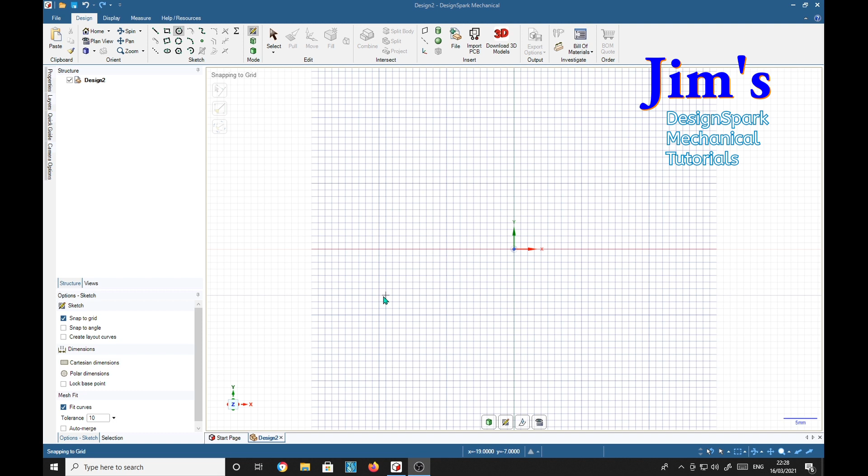Okay, in this video I'm going to show you how to put a handle on a mug or cup or tankard or whatever. So we'll make the tankard first.

We'll start with a circle. We'll just make it any size we like. Pull, move it a bit.

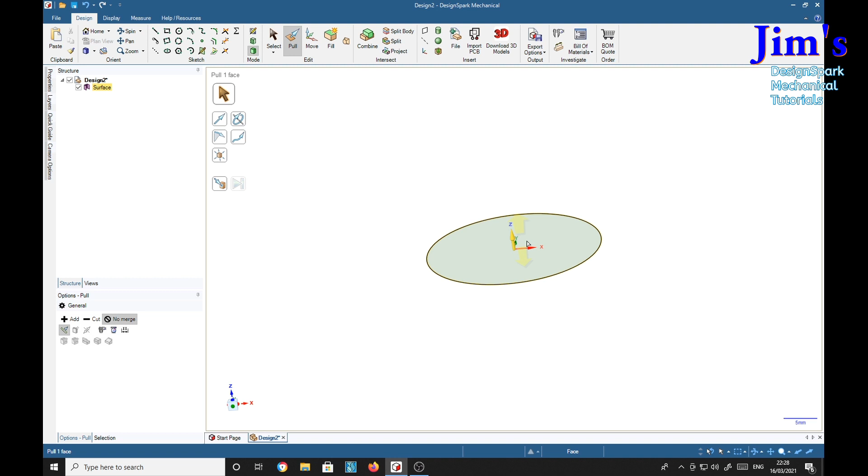That should do it. Then we'll use the shell tool up here. We've got one, we'll make that 2 millimeters. Return, click. Right, I've got a rudimentary cup shape there.

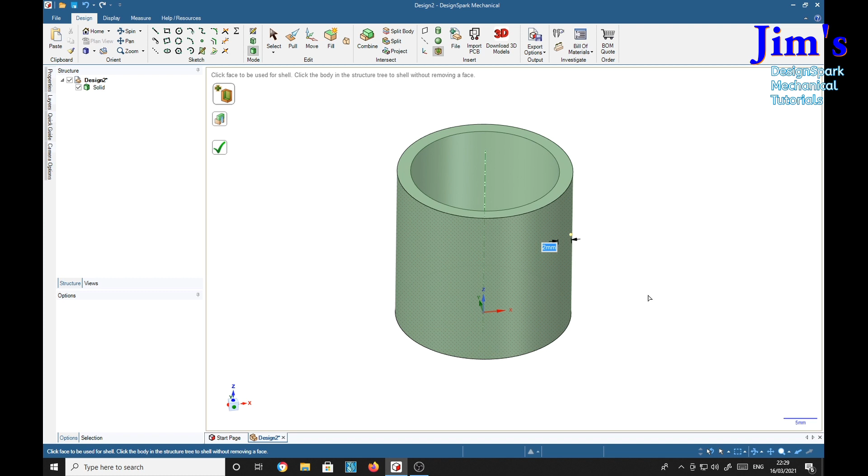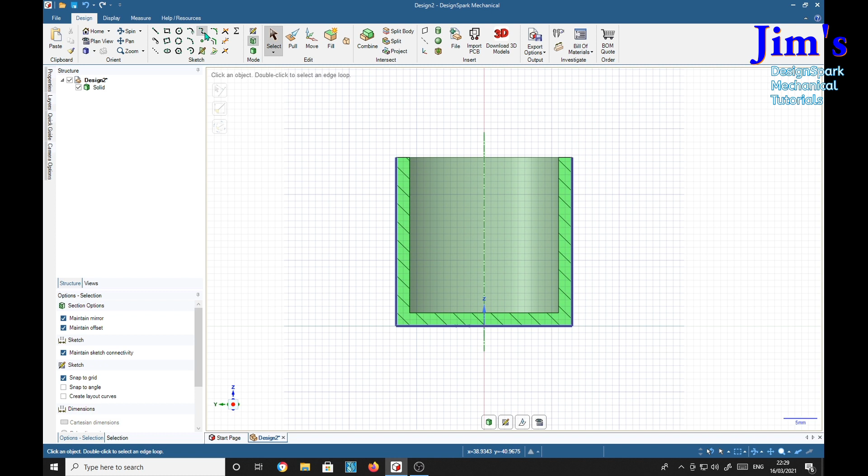Now we're going to select the center line, press the X key and we'll get a section. V key, there's our section. And we're going to choose over here the spline in the sketch panel. Select that.

I'm going to start in the middle of this thickness here, not on the outside, in the middle, or about here, and we'll make some sort of handle shape and end in the middle. And don't close it, because if you do, it'll turn into a surface rather than stay a line. Want it to stay as a line, then escape key.

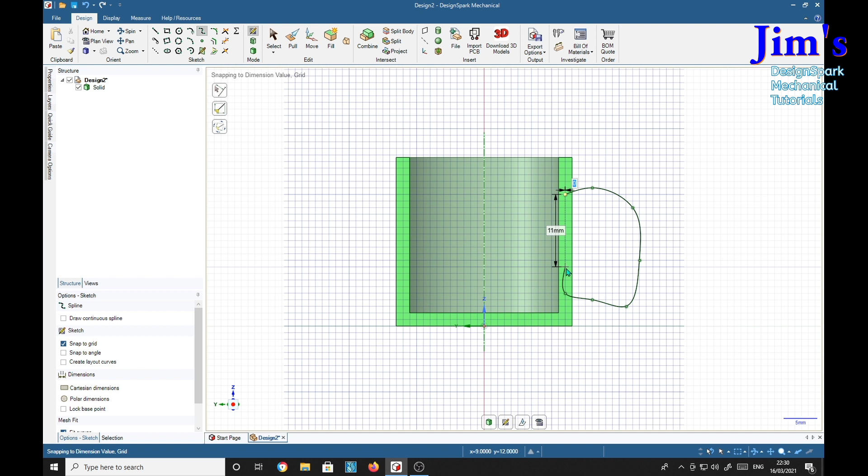Oh, what a terrible handle. Never mind. Now we'll go to D for design mode.

Select the select tool, select the line we've drawn in space. Then the cylinder in the insert panel.

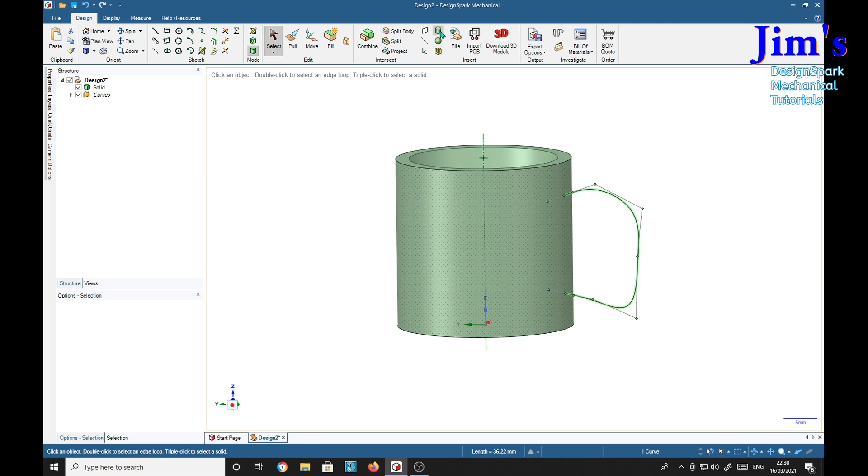And we move it until it's roughly the shape we want. 1.31. Right, there we go.

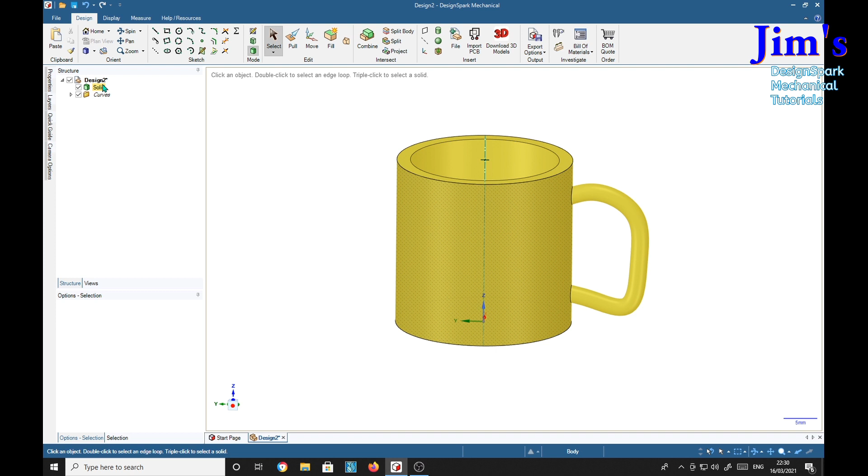And notice it's still one solid. It's merged itself.

So if we select the pull tool, we can select this corner here. Then control click this one. And if we like, we can control click this sharp corner in here. And then type 1 millimeter radius for them all.

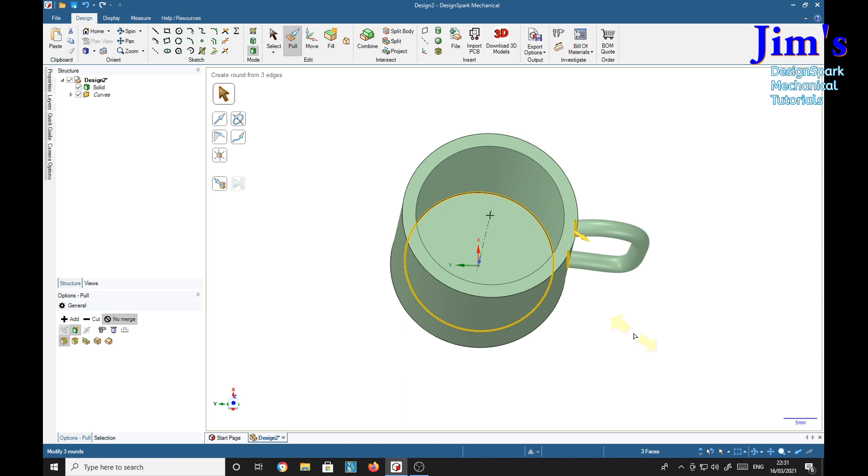Deselect, and we've got a nice radius in there, and we've got a nice radius there. There you go. We've got our cup, mug or tankard.

We don't want sharp corners here, of course, so we could easily select that, control select the other one, give that one as well, 1. We've got a nice circle around here.

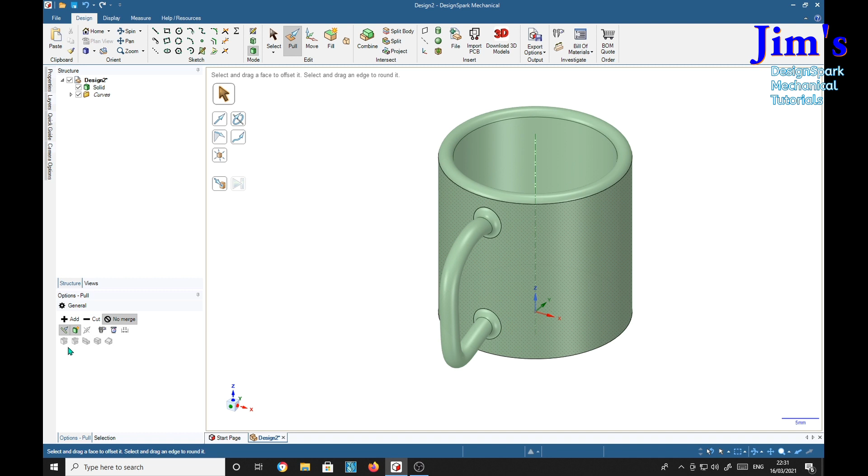We could have put bevels on if we'd chosen a different one down here, but I think that will be kinder to your lips.

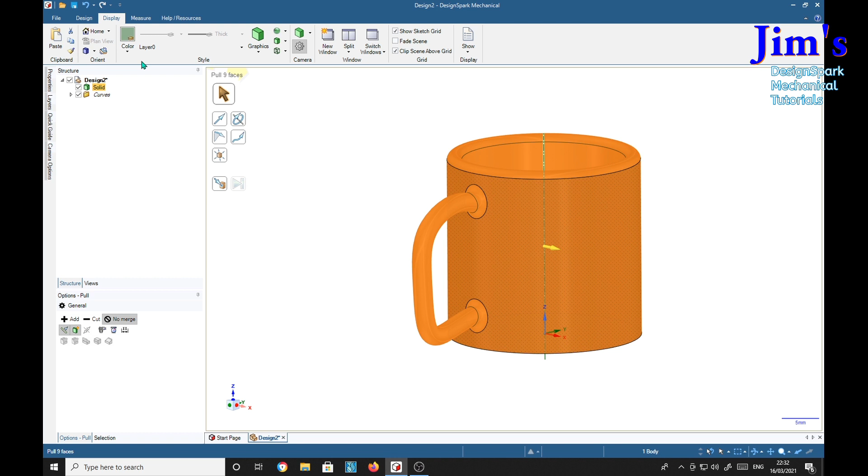Change its colour, of course, display, even change the luster and make it a metallic. Finish, medium gloss. What would be a nice shade? Slightly silver. There we go. There's our tankard.

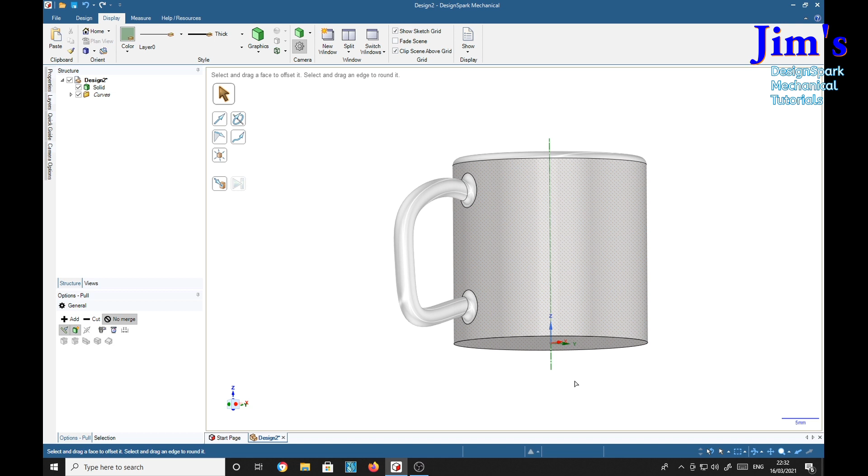You can make this rather more decorative than a cylinder, just make a different shape. You could concave it by using a profile and then rotating the profile into a cylinder. But that's the principle of putting a handle on a cylinder. Hope that might be useful to you and interesting.

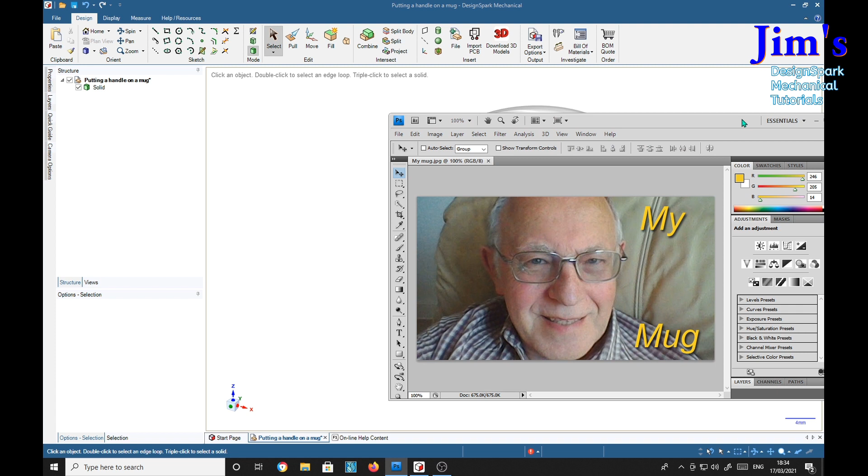As an afterthought, I thought I'd decorate this mug, and what better than a picture of my mug there. This is what I've done on Photoshop. So I've saved that as a bitmap.

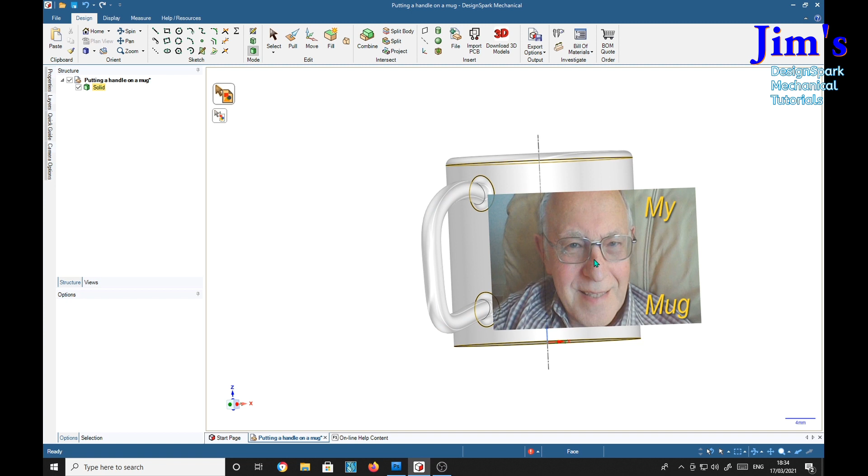So what we could do is we go to File, here's the bitmap. Okay, so we dump it on. I'll square this up a little bit. I'm going to put it just here.

Oh, got to do the wraparound. There we go, that's a wraparound. Just so I get the text to the left of the handle there. Now it doesn't fill it.

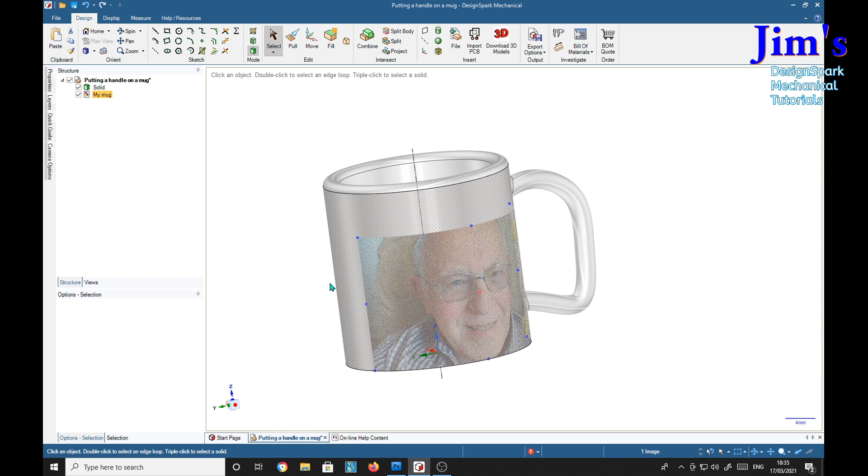So I'm going to select the mug. And now we see we've got handles here, little blue handles. So I think it's Shift and it remains in the right ratio, so yeah, there we go. I'll have to turn it a bit.

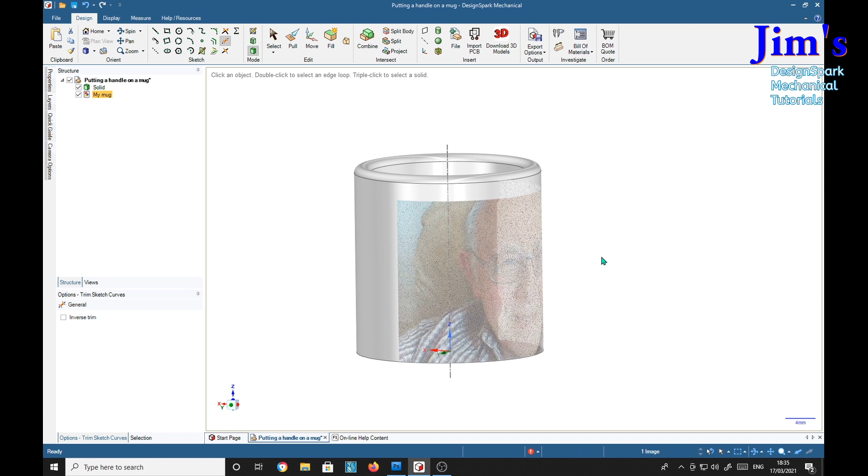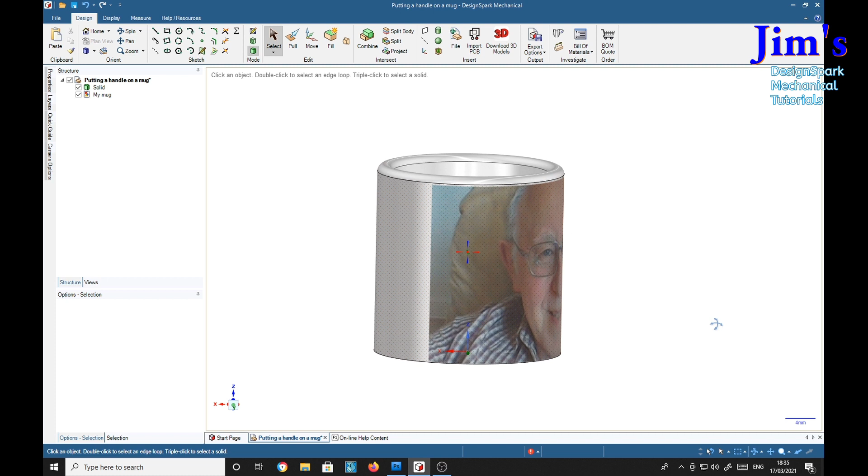Select mug. Where's the handles gone? Interesting. Select, then select the picture. Right, there. Now that of course hasn't filled the hole, so we'll do another one.

Bitmap. Wrap. And we can do the same. Just fit it in there to the bottom.

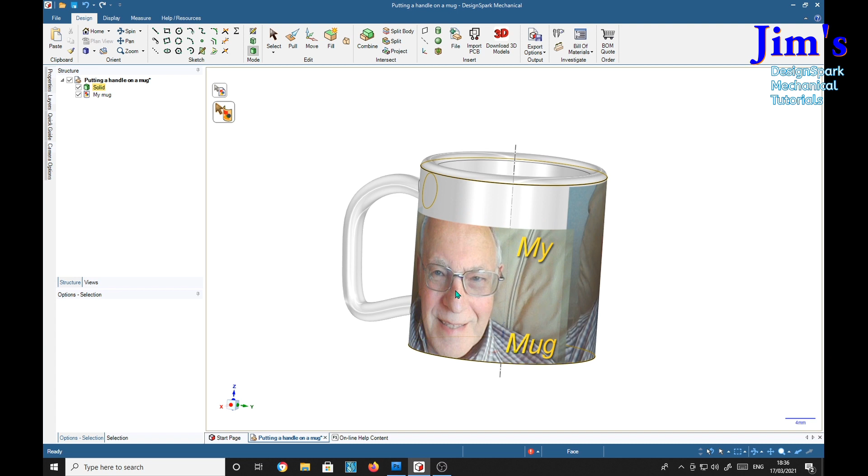Then select mug, shift and drag that. Oh dear. It has disappeared. But we've still got it up here. Isn't that strange?

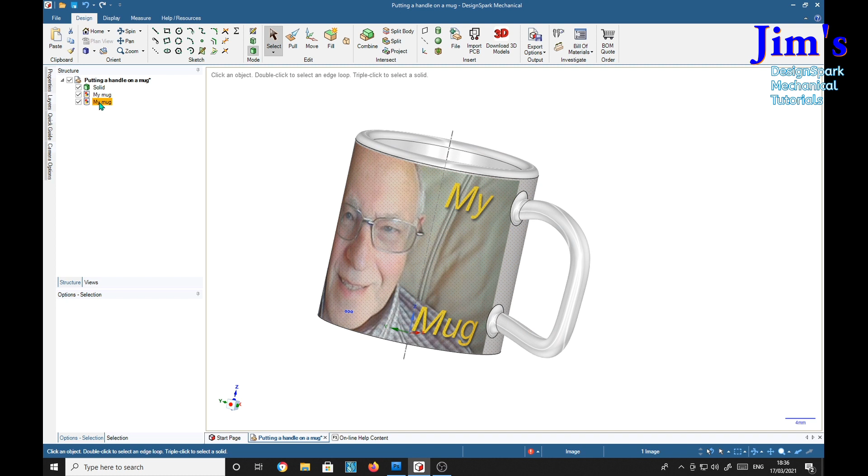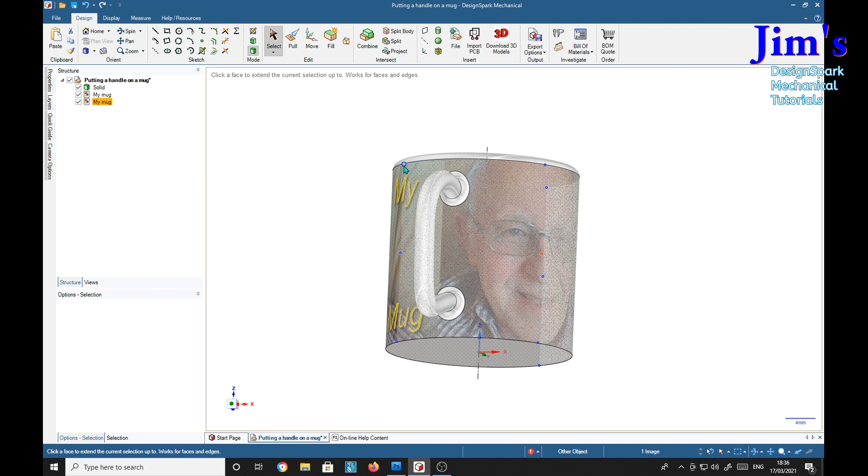Control Z. It's back. Shift. It's got back. There we are.

My mug with my mug on it. I hope you found that interesting and useful. Bye.